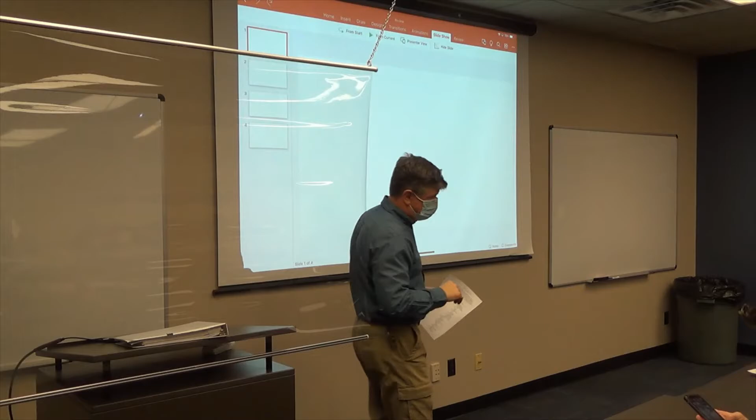Talk about what the final's going to be on Monday, or when you get your final on Monday, and we will go from there. So that was my plan for the day. You can ask questions about anything. If there's anything you need to go back and review or work on, we can talk about exam format questions, talk about content questions if we need to, talk about this last homework if somebody's still beating on that or whatever, so we can go back and look at anything. So this can be review time, whatever we need to do, whatever we need to cover, okay?

Sound cool? So pretty doggone simple, straightforward. So, and if everybody's quiet, maybe we leave early. And I'll stay here as long as we need to work on things and review stuff. That's fine with me. So there we go.

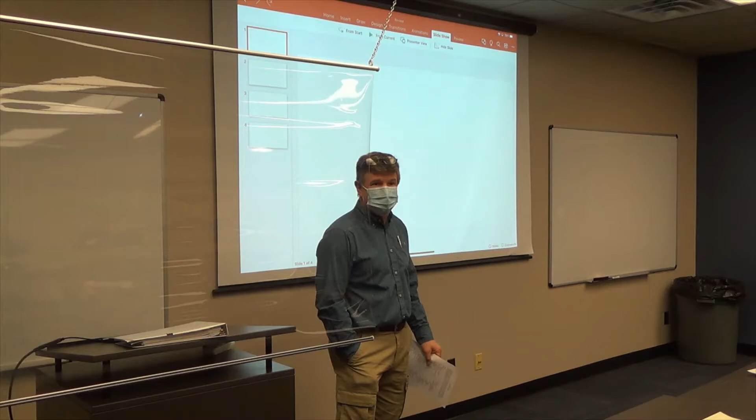All right, so the exam, here we go. You will get it on Monday morning, 9 o'clock. So in here, I'll hand you the exam. You guys can start to work on it. And like I mentioned, I will be here to answer questions, to give you some guidance on it and stuff like that. So probably a little more guidance than I would be on a regular hour exam, on a closed book exam.

So I would encourage you to bring your notes with you, and get to work on it, spend some time working on it, so not just grab it and walk away, but sit down in here, work on the exam, get through as much as you can, make sure at least you know how to do it. If there's some more busy work that you need to finish up, at least you know how to attack it and how to approach it, okay?

So this is a little bit unusual for me, I typically don't do take-home exams, and so this is going to be a little bit new to me. So the questions will be a little bit different than what you would have had on a regular hour exam, so they might be, and I'm hesitant to use the word involved, but a little more in-depth, so we can do some more things with the questions than you would typically do on an in-class final. And given that it's open note, there's more resources that you can get at and get to.

It would not be out of the question to expect a little bit of computer analysis, so you may want to utilize like the V-belt. We had some spreadsheets that we put together for V-belts, for the Brixius model, some of that kind of stuff, so it would not be out of the question to be expected to do some of that. And so we may need to do that either in here or that may be something that you want to finish up afterwards. All right, so a little bit different format, but content going to be basically the same.

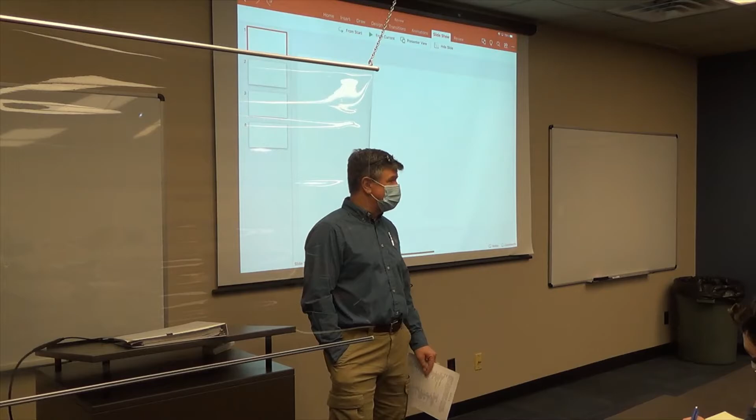So same kind of thing as before. It will be cumulative, so go back through old exams, go back through homeworks, go back through labs. Those are the kind of things that you'll be expected to be able to do. Okay, so content-wise, it'll be very similar to the other ones in that about 30 to 40%, maybe closer to 30% since it's a take-home final, it'd be thinking type questions, so short answer, explain yourself, those kind of questions. And then 70% probably in that ballpark of pure analytical, solve the problems, answer the question, come up with a design, whatever. Okay? So that will be the content.

The content will be heavier on the material that we've covered since the second exam. So it'll be a little bit heavier on that. So maybe closer to half of the exam content, something like that, will be on the last material. It'll be a split somewhere in there of cumulative and then the new material.

What I like to do is kind of integrate some problems so that you'll have some problems that, you know, I got this machine that I have to design, well then I have to figure out how to drive it, so I've got to design a V-belt or chain or something like that to drive it, or maybe we do fluid power to drive it, and then I got to figure out, okay, what kind of engine do I need to put on the front of it, and all right, if I'm going to buy that engine, how big of an air filter do I need for the air to come into it, so you kind of build all the way back through.

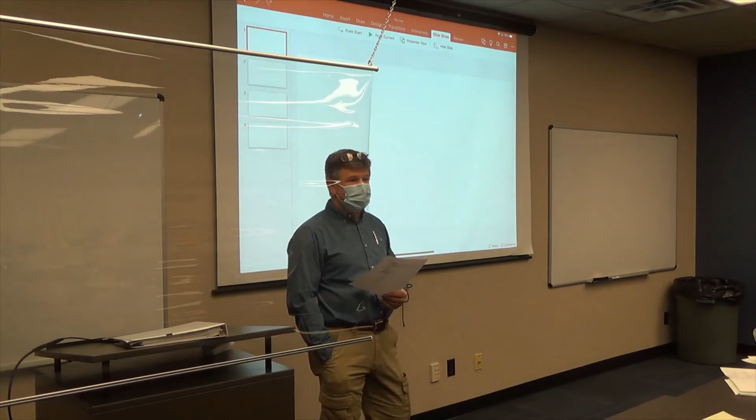I have to print them out to keep; we have to keep records. That's part of university rules, that we have to keep final exams for so many years. So I've got a whole pile of them that I forget to throw out. But yeah, I have final exams, so that's what I've got to do. Okay, make sense on that? All right. Any questions on format, that kind of stuff?

Take notes on a computer? I know Carson does, maybe some other people take notes on computers. You can have your computer with you, so if you want to bring your laptop on Monday, that would be fine. If you've got notes on there, or you want to work on some of those spreadsheet programs and stuff like that, that would be okay as well. All right?

Okay, so, things are barking and doing weird stuff. That's flashing and blinking. I've got a light up here flashing and blinking. I'm going to have a seizure for a minute here. If I do, just ignore me. I've never had one. Good.

All right, so what did we cover? Let's see. The last exam, as I recall, we covered fluid power. So what was not on the last exam was starting on the right-hand side on mechanical power transmission. Is that correct? I believe that's where we cut it off. Is that what you guys remember? The mechanical power was on the list. Oh, yeah, you're right. It was. Okay, so it's basically from human factors on, and then there's a little bit on the back page.

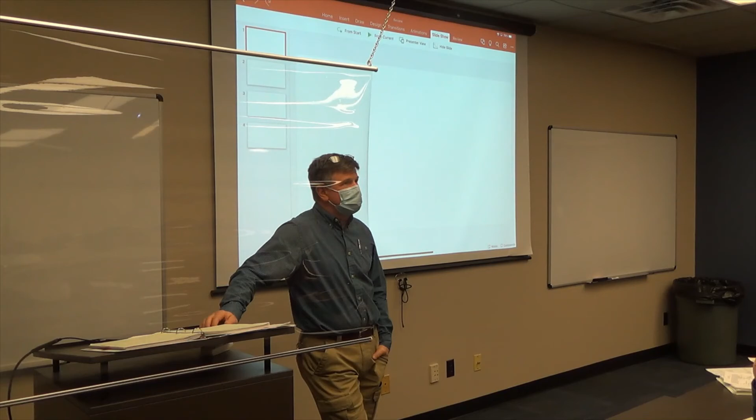Okay, so good question. If there's a spreadsheet problem, how are we supposed to show the work we did? I'll figure that out. Print it out maybe, or just give you the numbers, copy the numbers down. So I'll figure that out, but it's not out of the realm of possibility yet. That was one of the questions I was thinking about too, how we go about doing that. All right, anything else? Other questions?

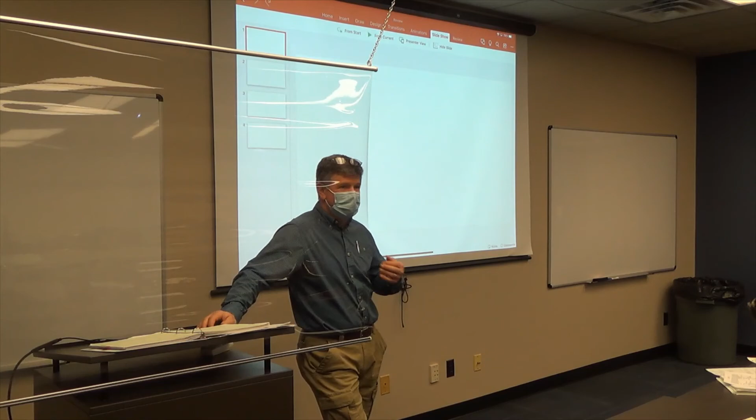I will be available the next couple of days, and of course nobody travels anywhere anymore, so I'll be available if I'm not in the office. We can jump on Zoom together if you've got some questions. Like I said, on Monday I'll give you a little bit more direction than I typically would with a regular hour exam, but I'm not going to sit there and show you how to solve the problem either. You've got to do some preparation and work on your own. So if you have questions, if you really don't understand how to do this thing, we need to have those conversations before Monday. But anyway, we'll play that by ear a little bit on Monday. All righty, I'm good if you guys are. Any questions? If you've got individual questions, I will stay and chat.

Oh, by the way, double check the grades. I've updated the grades this morning with everything that I have. So double check, make sure that everything matches what I turned back, and I didn't make any mistakes on what I recorded. I've got assignments coming in all over the place. They do get lost a little bit more this semester than ever before. So just double check, make sure everything is right. Carson, I just found one of yours that got buried, so there's one score that's not up there now that I'll get up for you.

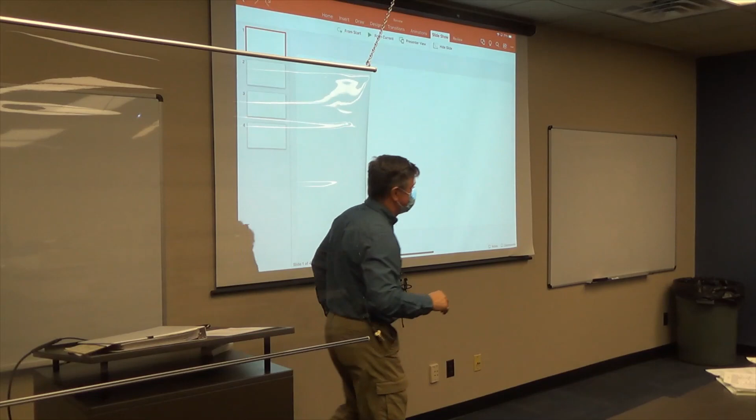Oh, yeah, we did. I might have. You want to? You got 100. Oh, I was just wondering. Yeah, I think we got it back. Take your word for it, man. Yeah, I don't know where I put it. It's somewhere out there, somebody's got it. Okay, that's fine. Maybe I'll have this other one done for you when you swing by. Have a weekend. You too, enjoy yourself. We're finished, we're done. It does look reasonable. It does look stupid.

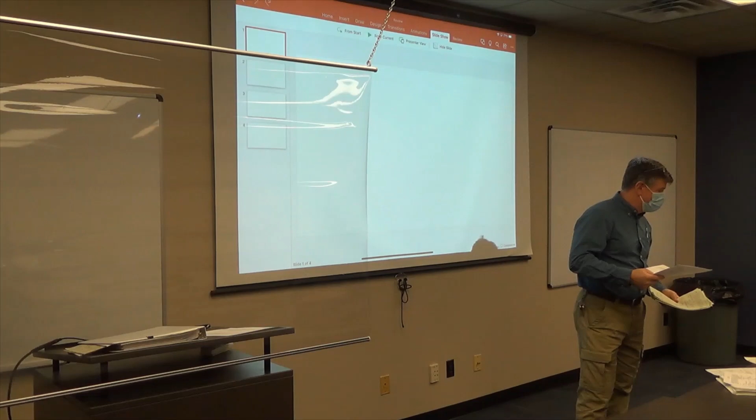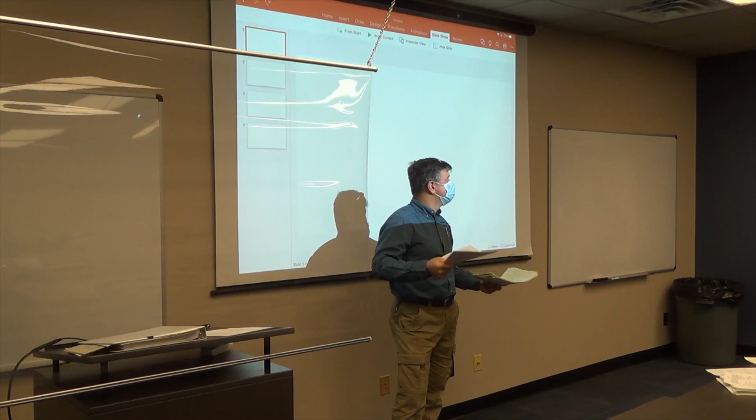I stared at this for a good 5 minutes, and it doesn't feel right. My air velocity is 73 meters a second. Well, you did better than I did, mine was higher than that. It's a fairly small pipe, and it's a lot of material, so it might be. The problems we did in class were 30 to 40 meters per second, so 70 would not be unreasonable. Everything I'm getting is like double what we had. Well, it's a small pipe that you're trying to push through, and it ain't gonna work. That's what you're gonna find out.

I've heard that, and it makes me feel good about it. But also, a Reynolds number of 740,000. Yeah, that is a lot. That's a big Reynolds number. Sometimes you have to run those numbers, put it on paper and show somebody, hey, don't do this, this is a dumb idea. Or, hey, if you want to do this, I'd love to put in an 800 horsepower electric motor to